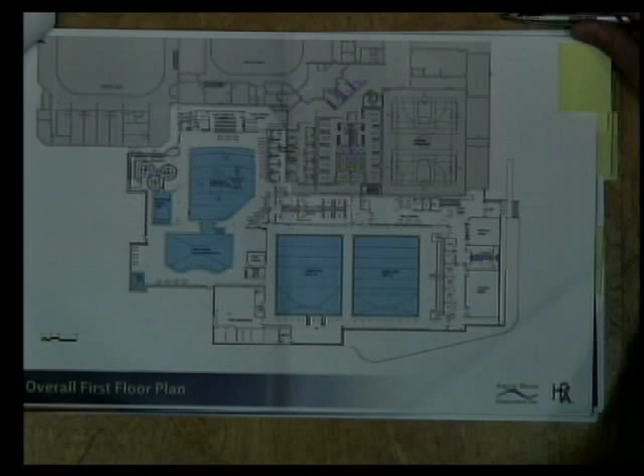We are zoomed in here on the document camera, and I'll try to orient you. For those familiar with the current facility, this area is the two racquetball courts, this is a gymnasium, over here is the main entrance, and all the way over is where the ice arena entrances are. So what we're proposing is flipping basically where the ice arena entrances are to the south side, and you would enter the aquatics addition. This is the first floor plan, and the next slide I'll show you is the second floor, where we're able to do a little bit of expansion on top of the first floor.

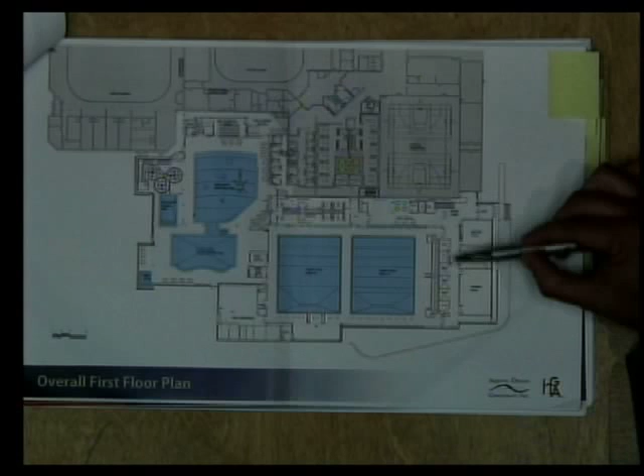So you enter in, and you can then take a left down this hallway. There's a public meeting room that, when there are swim meets, would also be the judges area to analyze scores and things, as well as the meet organizers. But it's also mainly going to function as a community meeting room. A pair of restrooms, and then what we're calling dry land training.

As we showed the council in our feasibility study, right now the swimmers are actually doing some of their dry land training in hallways, really tight circumstances, with no ability to use weights or resistance. So that's what this area would be outfitted with.

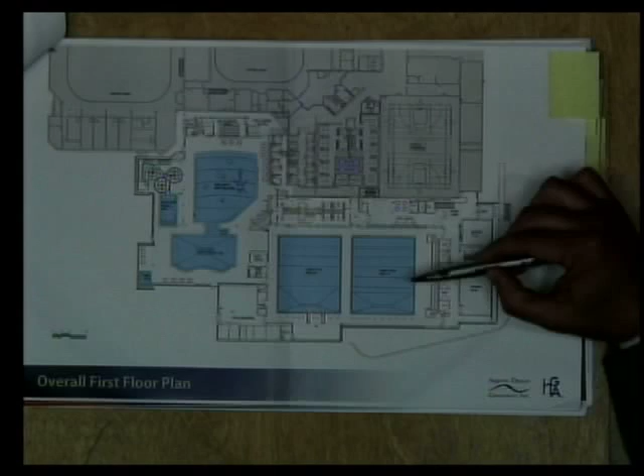This is a row of bleachers, several rows, able to seat up to 300 people. They actually go up two floors. You're looking at two pools, one being an 8-lane competition pool. This is where the starting blocks are.

This is the coldest water that we would have in the facility. It would make me shiver just being in it. But those who are really intense swimmers will love this nice cold water.

This is an 8-lane pool, same size as this one, but a little bit warmer water, with a deeper end, 2 diving boards, and a climbing wall. This is more appropriate for people who aren't as high level of lap swimmers or training for swimming, but may just want more casual lap swimming and exercising, as well as diving. The climbing wall and the deep water allow for some deep water exercise. The shallower water at this end allows those 7 to 12-year-old swimmers to advance their swimming skills.

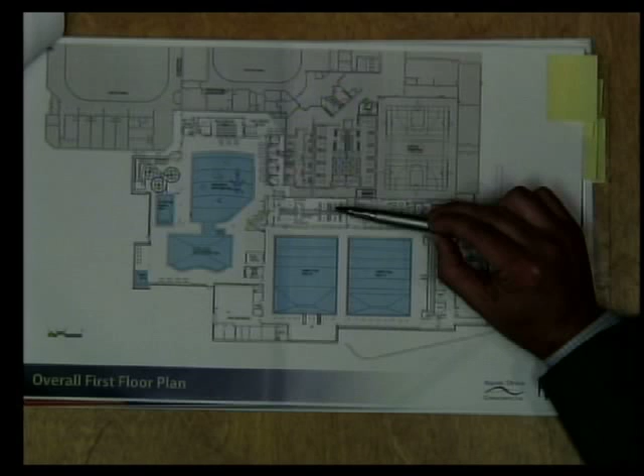We're looking at this as a phase 1, phase 2 project, but bidding it all at the same time. So as you go by the community center, it's just empty land right out here, and we would do this part in phase 1. It also has a lobby area back in here. It has what we call wet locker rooms, so you see a lot of tile in those and not any carpet, and it's really designed for just swimmers.

That's the main part of what is phase 1 in the lower level. Phase 2, I'll show you where our current pool is right in here. Once phase 1 is up, that allows us to move on to phase 2.

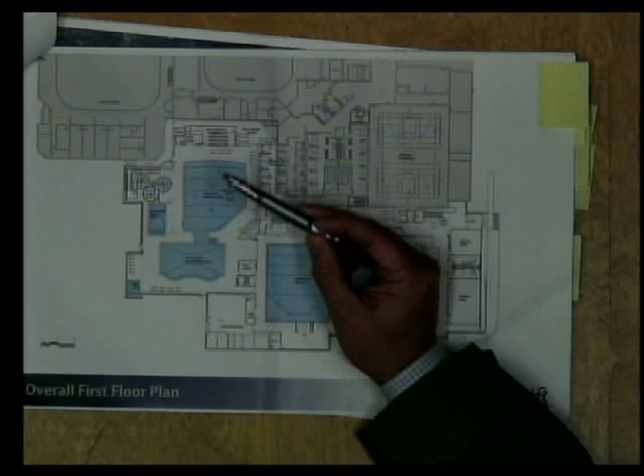This is our warmest water, and I'll show you some better renderings and photos in just a second. This is a zero depth entry. It also has a classroom that will help for some birthday parties or meetings, has some play equipment in it, and goes down into where this could also be lap swimming, but this is a really warm water pool and really family oriented and learn-to-swim oriented.

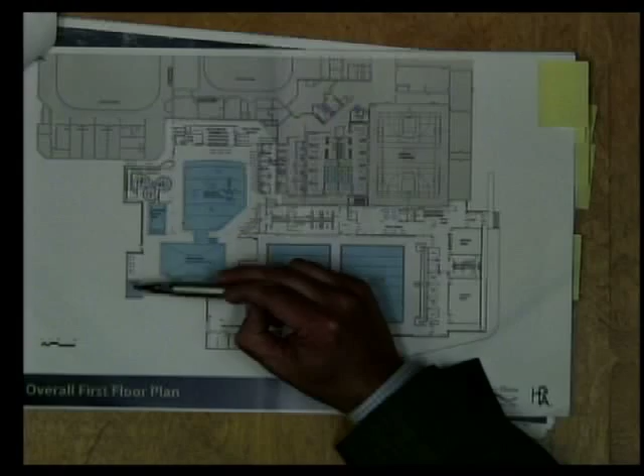There's a water slide, 2 stories, where you enter into a pool as you go to the bottom of the slide, and also a hot tub jacuzzi scenario. So those are kind of the main features of the first floor and the aquatics piece.

What it does allow us to do on the upper level, building over top of the entryway, is to expand our fitness area, add an elevator for both accessibility and safety purposes, add a restroom on the upper floor, and reconfigure the fitness studios and add an additional fitness studio to better serve the fitness activities that are happening. There's over 100 group fitness classes a week at the community center right now.

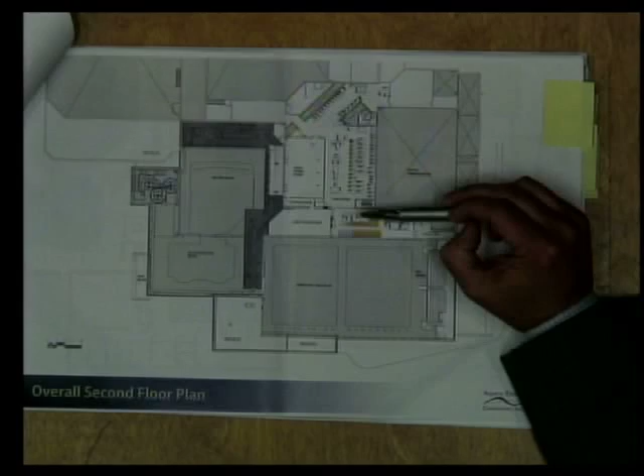If you're there at 6:45 in the morning or 6:45 at night, every one of the current treadmills and ellipticals is being used. These yellow squares represent about 20 more pieces of fitness equipment that would be able to be offered with this renovation. We'd also get a little more storage out of it, but that's essentially the second story addition to the fitness area.

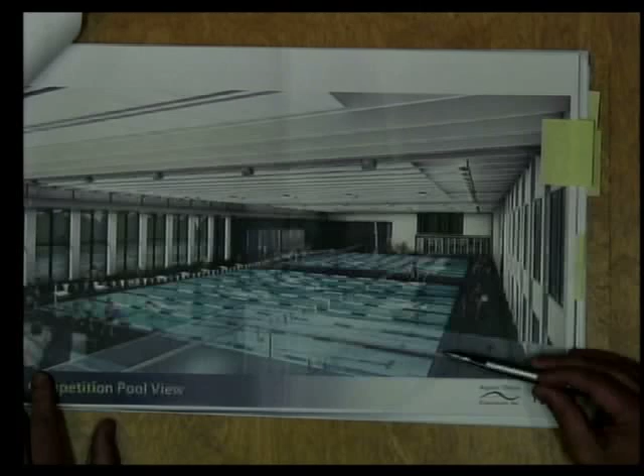This then, I'll orientate you back. Right in here are the bleachers, so you're looking across the 2 colder, more competitive pools. These are windows looking out at Valley View. This is the 8-lane competitive pool with starting blocks. You see the diving boards down here, and the climbing wall.

Eventually, this is the area that goes through to the second pool, or the recreation pool. You come out of the locker rooms on this side. Back behind the bleachers is where the entrance is, and then also the dryland training is over in this area. The bathrooms that I showed you, and then also back into this area is where the meeting room is, just off the lobby.

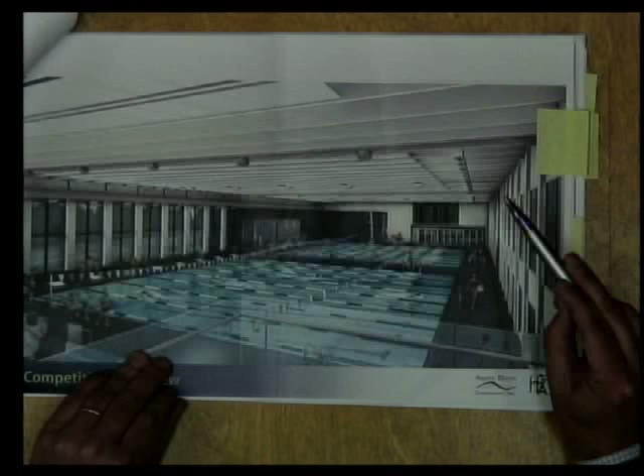Up above here, down in this area, you're actually looking out of that group fitness studio onto this body of water. Back here, out of these windows, you're actually potentially on a treadmill or an elliptical, looking into the water here.

This is just a few examples. This isn't going to be the configuration of the play equipment that would be here. That would mostly be moved over to this side of the pool. But as you can see, this is a zero depth, so you walk straight in from the tile right into the water. And then as you follow this around, that goes through into that bigger square area.

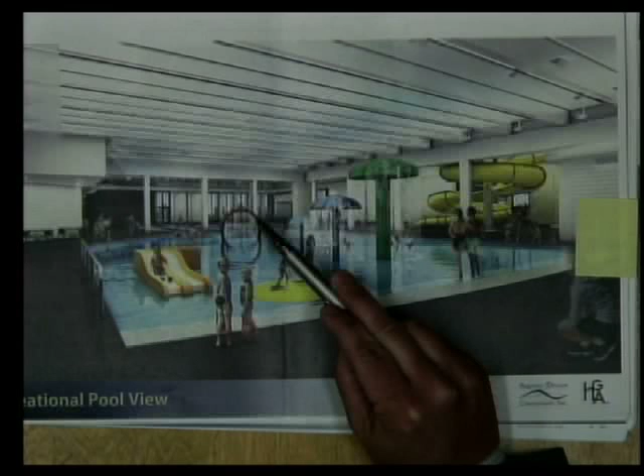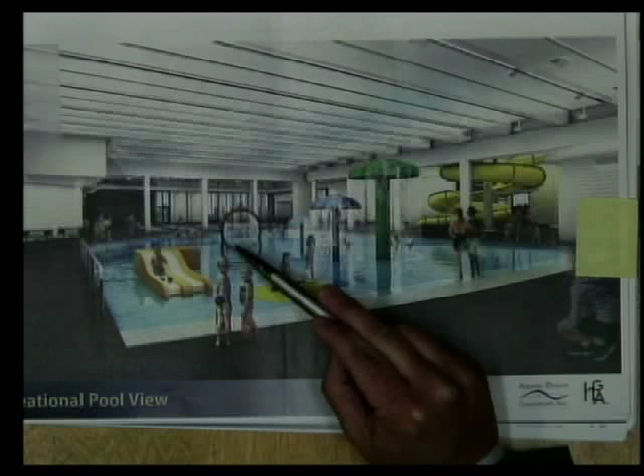That's a little more of, probably about a 20-yard potential for lap swimming in a very warm water environment. So this might be where we have some of our senior or rehab exercise classes in a good warm environment. Also, it's where some of the youngest kids' swimming lessons would take place. And then, as you can see, it's a fun place for a family to go with younger kids and be able to be in water that's accessible to kids that aren't able to swim.

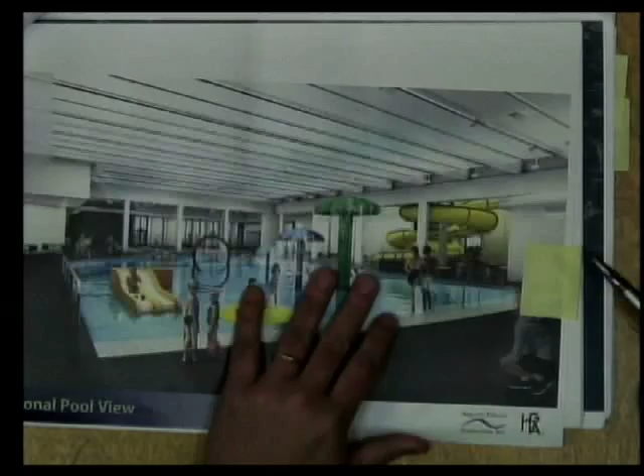A couple of other slides that I'll show you, some current exterior elevations that you're looking at.

This is where you enter. Right around this corner is the current main entrance of the community center. This right now is that big block brick wall of the racquetball courts gymnasium, so we're showing some more planting there.

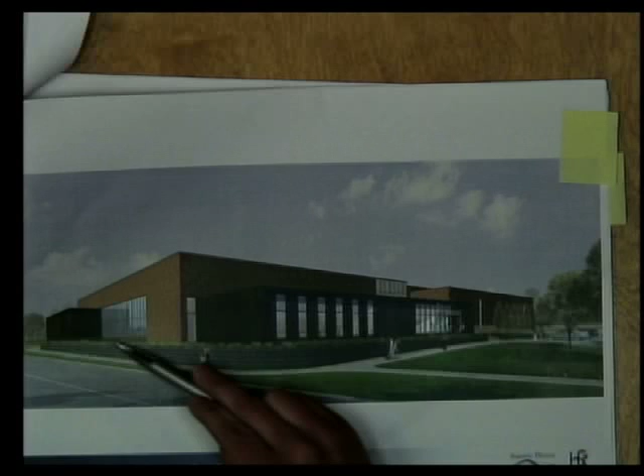Again, you enter here, go down the main spine of the hallway. You're seeing these windows are the small meeting room. This is more of the panels where the restrooms would be. This is the dry land training. And then this is going, again, along Valley View where the windows go into the pool area.

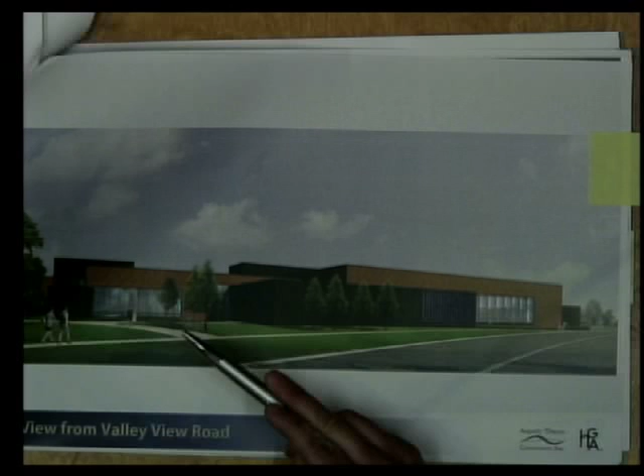This view is actually if you were coming from the high school, heading this way. Right now, all of this is kind of an open area. It's where the wading pool used to be, but that got filled in with some concrete. Really just a couple trees there now, so we're suggesting we would add in trees and make this a little more of an architecturally attractive building as you're coming down Valley View Road.

So with that, I know tonight you're looking at the variance with the setback as well as the height. I'm just going to give you a little bit of perspective on where some of those property lines are. As you head back towards the high school, this darker green represents a storm pond, so we're quite a ways away from any other buildings.

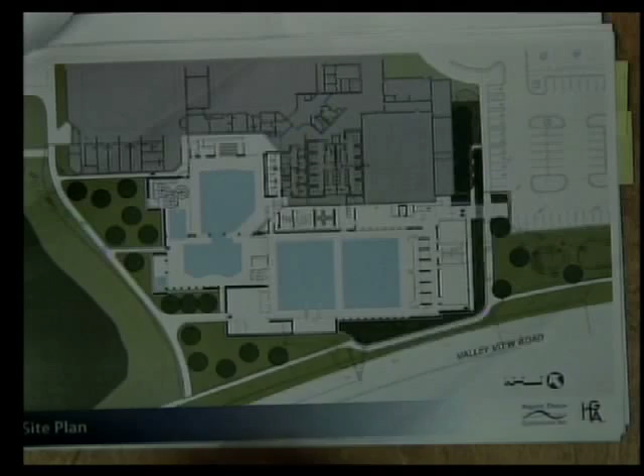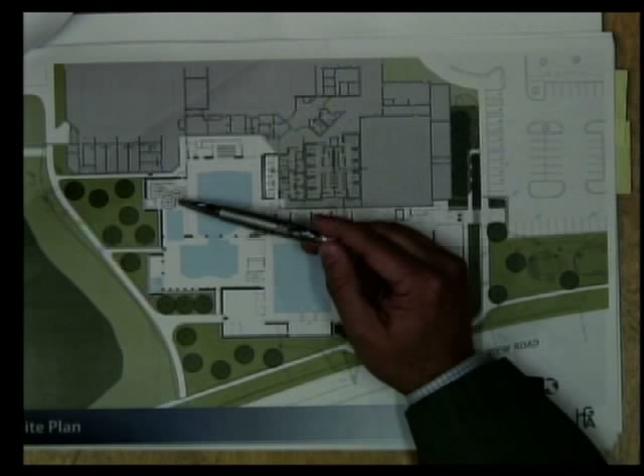We are looking at one of the higher walls is this water slide structure. That's in phase 2 at best. We're looking at having that as an alternate, and it's also being designed where if costs come back too high, we would be able to just leave that off from the project. Hopefully all things work out, but that's one of the larger cost items that would be put into an alternate, and the council would have a decision to make if that's warranted to stay in the project.

So with that, I'd certainly answer any questions or if you have other thoughts. Thank you very much.

Mr. Franzen, do you have anything to add at this time? Only that the staff recommends approval of the site plan review on 103 acres and approval of final order 2014-02.

Okay, thank you very much. Seeing how this is a public hearing, is there anyone out in the audience that has any comments or concerns about this project? Now would be the time.

Not seeing any, commissioners, do you have any comments or questions? I have a question, Mr. Franzen. I don't see parking mentioned in here. Is the existing parking sufficient for this expansion? Is there any issues around that?

Maybe there's a two-part answer. There's the park and rec, maybe scheduling point of view relative to parking, and then there's the city code relative to parking. Based upon the use of the building, the amount of parking that they have is adequate according to city code.

I'll give you the second part to that. So we have a couple of opportunities, and we want to look at that as we keep moving forward. But behind the community center, which sometimes looks like it belongs to the community center, it's actually a school parking lot. So during the day, it belongs to the high school, and the priority is for all of their teachers to be able to park there. It's roughly about 70 spots and has not yet been well discovered.

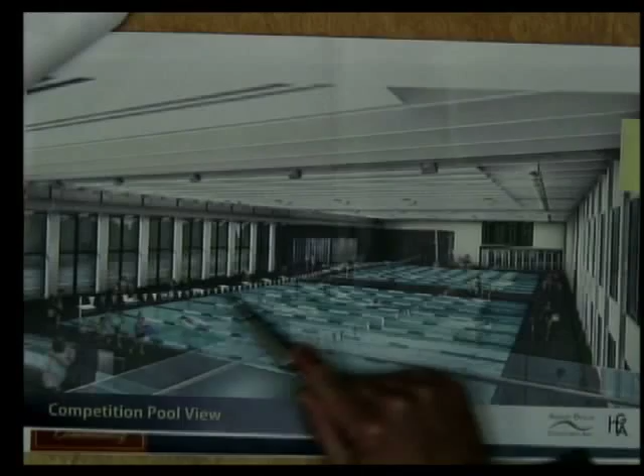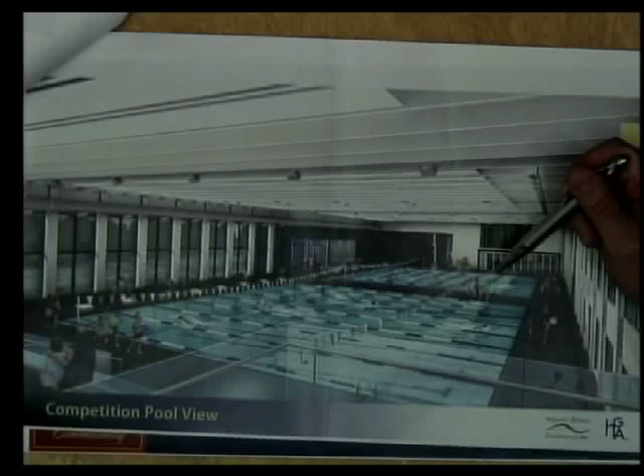So what you see here is about 7 feet 6 inches deep, going up to about 3 foot 6, coming up so you can use the starting blocks appropriately and safely. Over here, this is about 12 feet in depth, so you could do the diving piece. You're also talking about different bodies of water, which is good for redundancy and for water temperature — this is the coldest pool, highly competitive, while this is the one where you'd see the Fox Jets in the high school meets primarily.

This is the one that becomes a lot more flexible. It's probably where the kids that are going to go for open swim, if you're talking about teens that really want to get in and use the pool, they're going to go in this slightly warmer water, more depth, ability to play some water polo, water basketball.

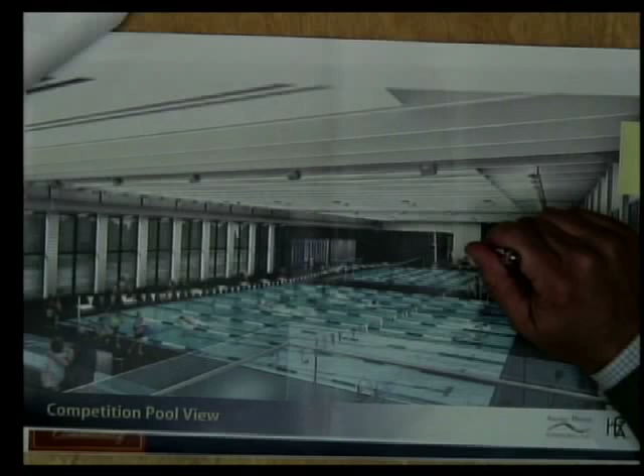As we did hear from the 1 or 2% of the most highly competitive that says you should do a 50-meter, we would love it, they would love it, but it's not the best use of the facility for overall community members, and it's not the best use of our funding sources to add that in.

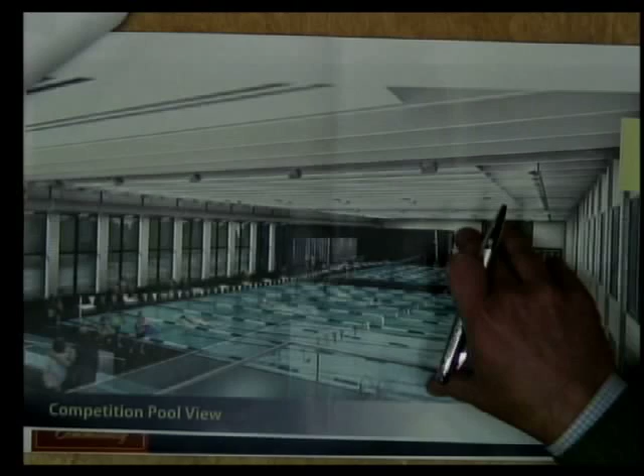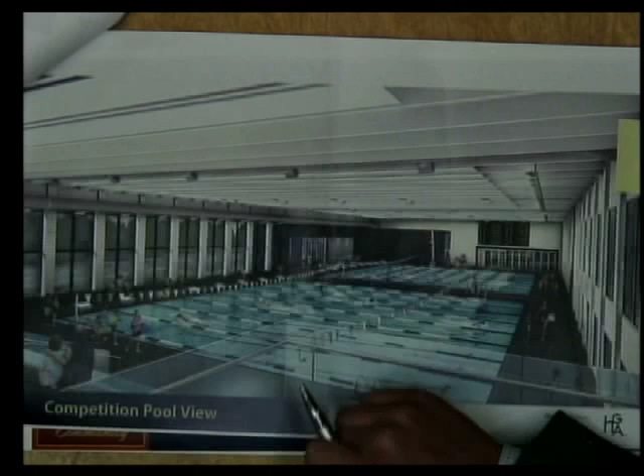We actually get more flexibility by not having this as one large body of water with a movable bulkhead than we do with having it as a large body of water, and at a reduced cost too. I think you'll see that at the U of M. A lot of colleges will do that, but it's not the best approach for a community center or community pool when you're going to have multiple bodies of water, when you could have them.

My question for you, one of the things that we're approving, if I read this correctly, is what's called the site plan review. What is that? What's the import of that, and what does that really mean? And then I have a follow-up with it.

We have a section in our city code called Site Plan and Architectural Design Review, where we look at more than just the bulk height, density, setback, and parking requirements. It has to do a little bit more about where the building is on the property, how you get pedestrian access in and out of there. What does the building look like architecturally? How does it relate to the building mass? Does it blend in? Does it add some interest to it? And how does it use landscaping more than just a quantitative requirement, kind of a qualitative requirement.

It takes... we get a better design out of the product than by following the mathematical elements of our city code. That's what it does.

Thank you. So here's, I guess, just the question I have. We've got a wonderful looking project with a lot of detail, and we're playing a role, and then there is another commission playing a role in looking at this project. And my sense from a business perspective is a little bit that some of the questions that are coming up because we are not as fully informed in terms of the background for this project and some of the details that have gotten us to where we are now, as we probably should be.

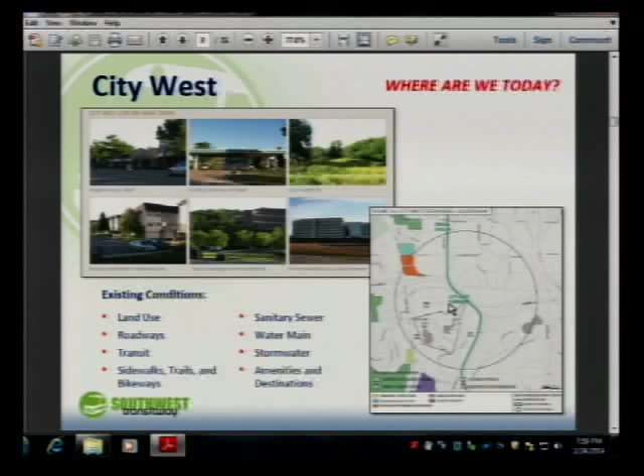We look at sidewalks, trails, and bikeways, utilities, stormwaters, and we look at amenities and destinations, because some of those things are going to drive ridership, transit ridership at each station. We want to make sure that people can get to and from those destinations to the station platforms. So for each one of the stations, we look at those kinds of factors.

At City West, the pedestrian and bike connections, what we're recommending as station area improvements is to develop more direct path connections between the station and City West Parkway, which is to the south and to the west of this station platform. We're looking at developing pedestrian connections between the station and the United Health Group buildings themselves, because you're going to have 6,700 new jobs there, and those folks are going to be using light rail.

We talked about streetscape enhancements, bike facilities at each station area, and then the idea of exploring bike sharing facilities, so like Nice Ride kinds of things, bike lockers, pumping stations, those kinds of things.

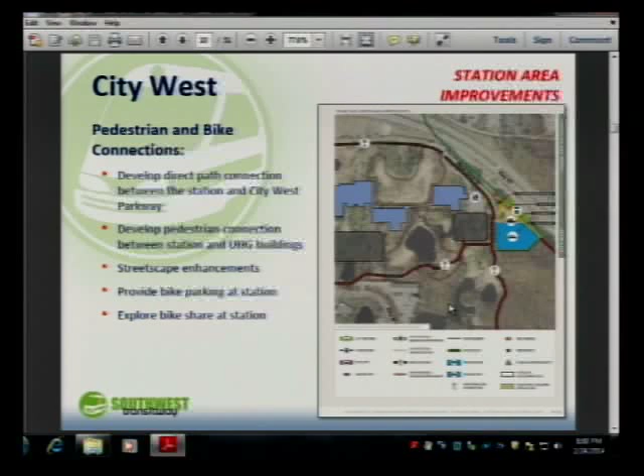We look at Kiss and Ride at this station, so folks that want to drop people off, get on the light rail, and then they take off, and then pick them up at the end of the day, that kind of thing. We look at Park and Ride, right? So the blue area on there is the Park and Ride lot. The Kiss and Rides within that area as well. In this case, there are approximately about 200 Park and Ride spaces at this lot.

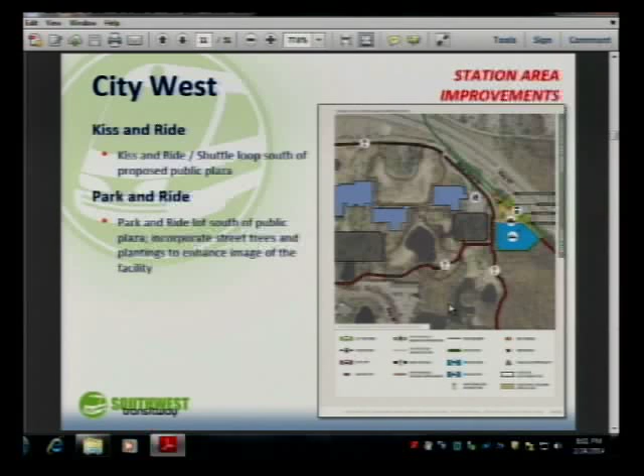200, did you say? 200, yeah. And we recommended incorporating things like trees and plantings to enhance the image of that parking facility.

We also recommended station amenities that go above and beyond what the SPO means. That's the project office. And so the engineering team is responsible for a certain amount of station area planning, which included some wayfinding, some seating, some lighting, those kinds of things.

So at each one of the station areas, if you look through the document, we recommend above and beyond that additional wayfinding that reaches out beyond the station platform itself to help people orient themselves and get to that station platform from those employment centers and from their homes. Seating, lighting, in this case a plaza area, just to the north of the Park and Ride, adjacent to the platform, public art, and bike facilities.

Development potential. At City West, the near-term development potential has to do with United Health Group. At some of the other stations, there's more development potential. But we looked at key considerations to enhance development potential around each one of the station platforms.

So we looked at things like built form and land use, the public realm, those kinds of improvements, and then mobility kinds of considerations. So in this case, built form and land use, orienting the buildings to face onto the station, maybe locating retail amenities near the station to help service transit users and some of the employees at the new United Health Group. Create a positive image on the campus and LRT from the highway itself.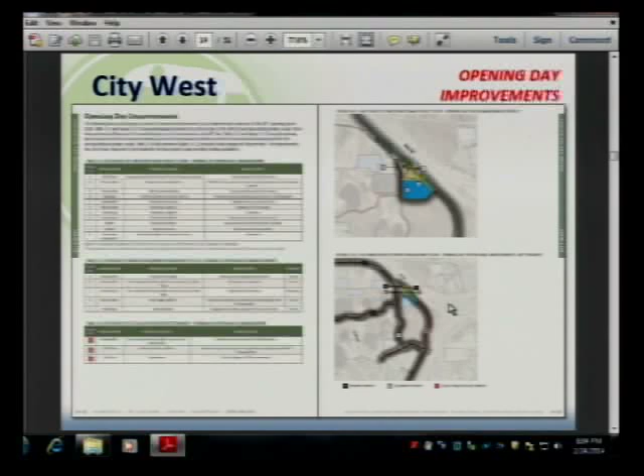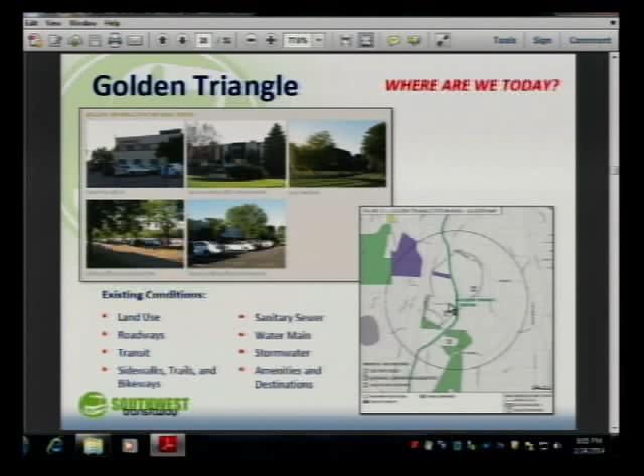So now I'll go through these a little bit quicker since we've taken the time to explain what's in that. Golden Triangle is the next southerly station. Again, we looked at the same kinds of existing conditions around this station. The existing conditions around here, the land uses include more light industrial and office kinds of uses. In this case, we recommended some new roadways.

These new roadways help activate the area around the station platform, and really help incent new development or future development near the station itself. These recommendations are pretty consistent with the Golden Triangle Land Use and Transportation Study that was done probably about 10 years ago.

In this case, the city's already been looking at extending West 70th Street to the west to Flying Cloud Drive. It also looks, long-term wise, to develop a new block and street network beyond Flying Cloud Drive and Shady Oak Road to provide some smaller blocks so it's more walkable.

Today, this is not a very walkable environment out there. There are huge blocks, very few roads, and some trails, but not really enough to promote the use of this new light rail station the way it should be used.

We looked at pedestrian and bike connections, creating a multi-use trail system from the station north to Shady Oak Road and south to Valley View Road, extending existing path networks east and west of the station platform, and new sidewalks along both sides of West 70th Street.

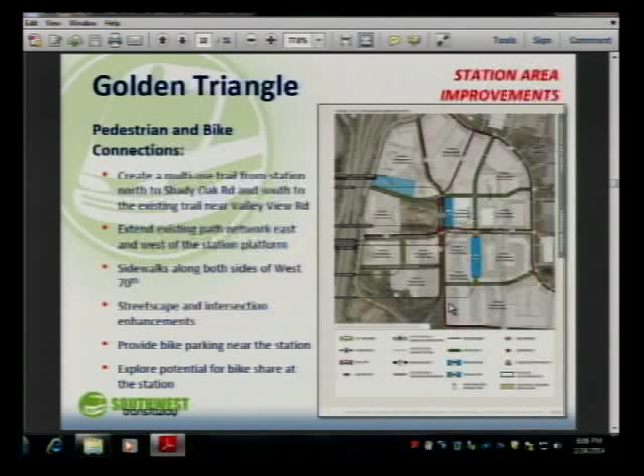We identified streetscape and intersection enhancements within the area, providing bike parking near the station and exploring potential for bike sharing near the station.

At Golden Triangle, there's a small need for park and ride. We looked near term at the idea of leasing some existing surface parking spaces in the two darker blue areas you see there to meet park and ride goals.

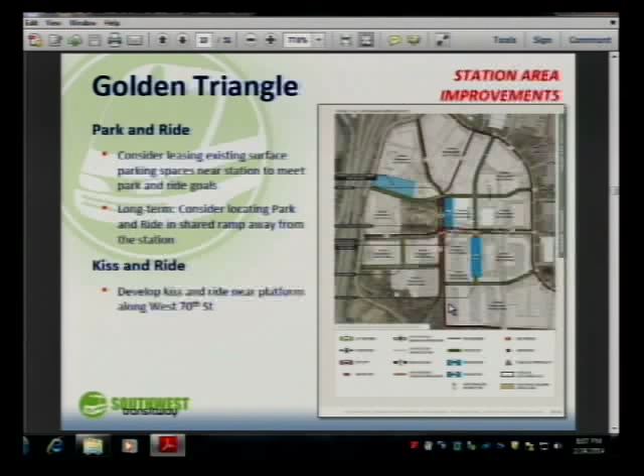Long term, there were discussions about considering park and ride shared in a ramp just to the west of the station platform, with those spaces shared with a proposed office development just to the south of that park and ride lot. There's also Kiss and Ride along West 70th right next to the station platform—similar kinds of station amenities beyond and above the SPO base project scope.

In this case, because we're recommending some new roadways, we also took a look at some conceptual street sections to try and make these pedestrian friendly, including the idea of fronting those sidewalks with new buildings. Today, the buildings are set way back from the street, so it's not a very pedestrian-friendly situation there.

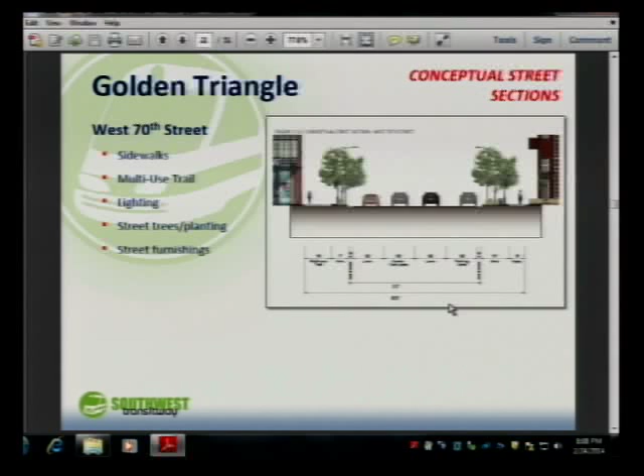Getting a multi-use trail on the north side of West 70th, the sidewalk on the south side, some on-street parking lanes in there, and then some streetscape amenities, furnishings, new lighting, street trees, that kind of thing.

We did look long-term at pretty significant development potential around this station. Again, these are consistent with that 10-year-old Golden Triangle Land Use and Transportation Study, which calls for some new housing in this area, medium to higher density housing—so you're talking about townhomes and apartment-style units.

You can see those in the colors that are sort of pumpkin-colored to brown—that's more of the multifamily housing. The darkest brown also includes mixed use, so maybe at the ground level near the station platform there are coffee shops or restaurants, those kinds of things that help support transit users at the station platform. And then you see some office uses and commercial uses, which are pretty consistent with the uses out there today.

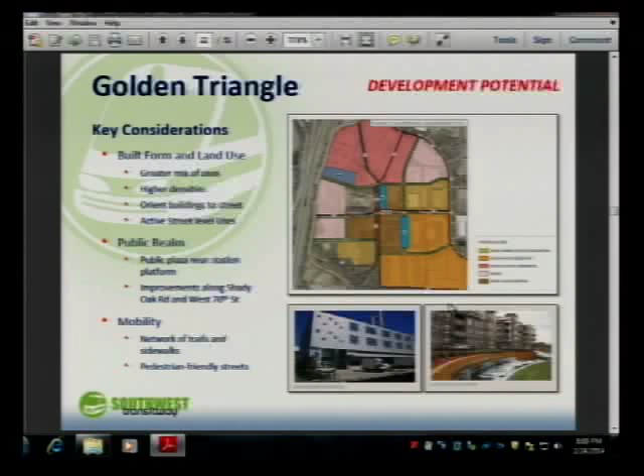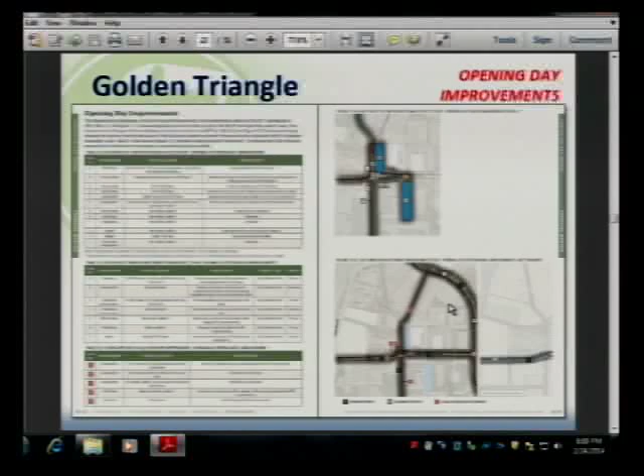Eden Prairie Town Center is the next station coming south of Golden Triangle. Again, looking at the same kinds of existing conditions, you all know there's a lot of commercial and retail kinds of uses around there, some office uses, some multifamily housing, and some significant park and open space uses as well.

We're recommending some new roadways consistent with the town center master plan, creating smaller block patterns and a more connected roadway network, which will make this a much more pedestrian-friendly town center. To service the proposed alignment and station platform location, Eden Road would need to be extended west to the station platform. We've also looked at extending or building a portion of what's been identified as Main Street from Singletree Lane north to Technology Drive, providing north and south connections through the town center from the station platform.

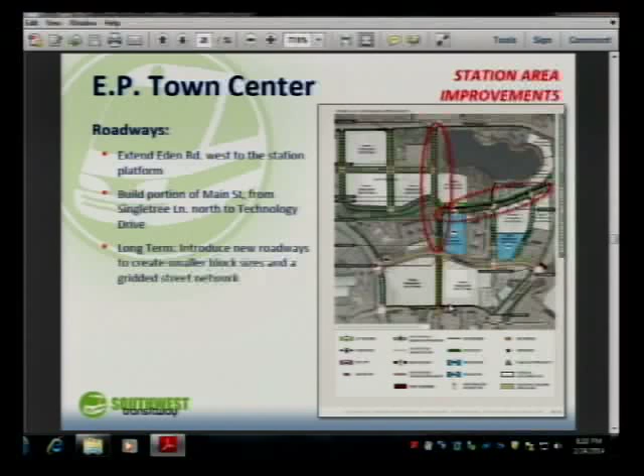Long term, those new roadways create smaller block sizes and a more gridded street network in the town center itself. Ped and bike connections, streetscape enhancements, connecting to the regional trails, improved pedestrian crossings at the intersections. Complete street design is recommended here, trying to accommodate as many forms of transportation as possible: the car, the pedestrian, the bicycle, and public transit.

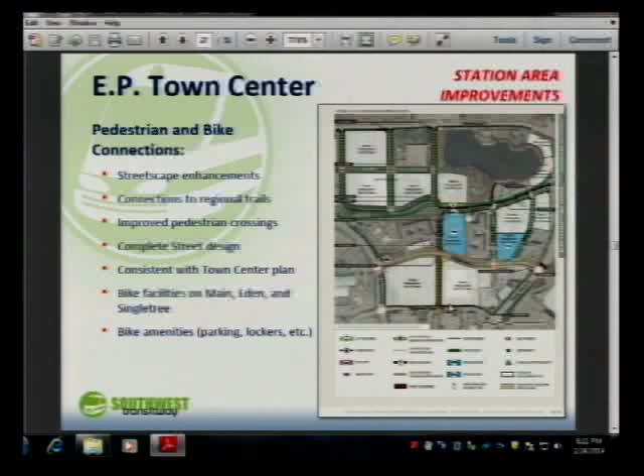This plan here that you see is consistent with the town center plan. And then new bike facilities on Main, Eden, and Singletree, and bike amenities at the station platform itself.

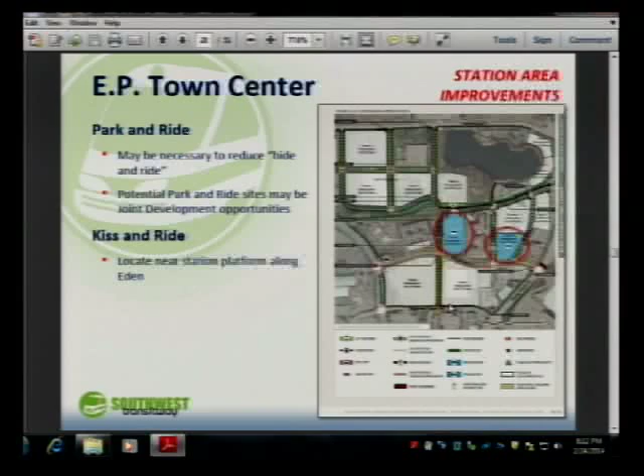We did look at the idea of perhaps some park and ride within the town center itself, particularly early on, before the town center becomes what the city has envisioned. The idea was to try and reduce what we call hide and ride, where people park in some of those existing parking lots today and then use the transit system. So we identified a couple of park and ride sites that also could be looked at as potential joint development sites—meaning it could be a park and ride ramp wrapped with maybe some retail use at the ground level and other kinds of uses integrated with that building itself.

And then the kiss and ride near the station platform along Eden Road. Similar kinds of station amenities: wayfinding, seating, lighting, a plaza near the station platform, some public art, and bike facilities.

Eden Road, we've taken a look at that as well, extending it west to the station platform. So you see this conceptual street section here with on-street parking, sidewalk and trail on both sides of the street, transit facilities, lighting, street trees and plantings.

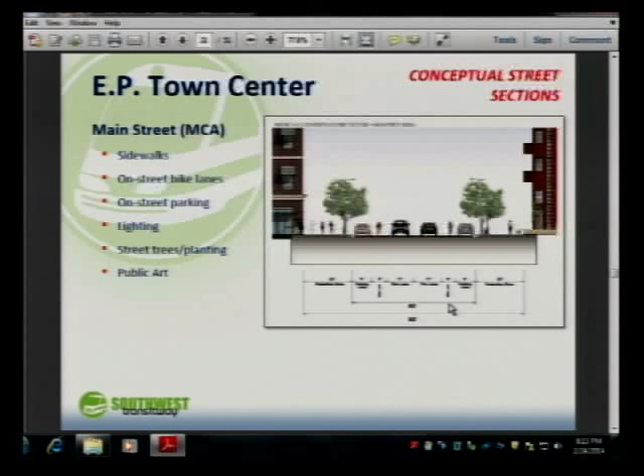We've also looked at the future Main Street, consistent again with the streetscape master plan done for the city a couple years ago. So generous sidewalks, 20-foot sidewalks on both sides of the street, some on-street bike lanes, on-street parking, lighting, street trees, planting, and public art.

And then, of course, with those infrastructure improvements and the idea of trying to create this town center, there's tremendous development potential. Those new roads and the investment in the light rail station should incent new development in and around the area.

We looked at mixed-use infill, uses consistent with the town center plan—orienting buildings to the street, active street-level uses, an active public realm with a plaza, and some improvements along Flying Cloud Drive to try to reduce the perception of that being such a wide roadway and bridge the gap a little bit between the town center itself and the shopping center across Flying Cloud Drive.

Mobility, the new street and block pattern, and pedestrian-friendly streets should all help make this a more pedestrian-friendly environment.

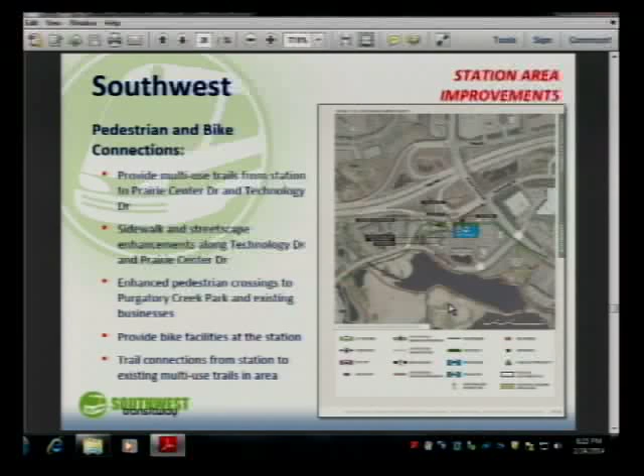The park and ride at this station may require some expansion, so perhaps a new ramp. That is yet to be determined, but if that is the case, that would be paid for by the engineering project. The Kiss and Ride located near the station platform too. Similar kinds of station area amenities.

And we didn't see a tremendous amount of development potential around this station, but some. In this case, integrating active street level uses within the park and ride facility in the event that a new park and ride ramp would be built. Introducing a mix of high density residential or commercial uses over time on some of the sites that today might be surface parking lots. And then orienting buildings to the street.

Mobility improvements would include things like minimizing conflicts between the bus drop-off and the Kiss and Ride, improving access and connections to Purgatory Creek Park. Opening day improvements.

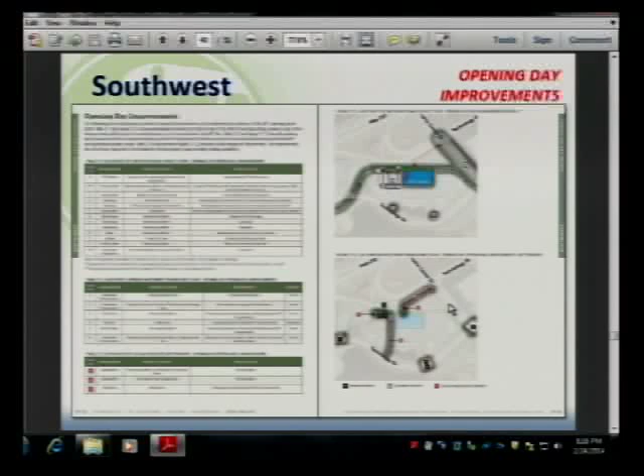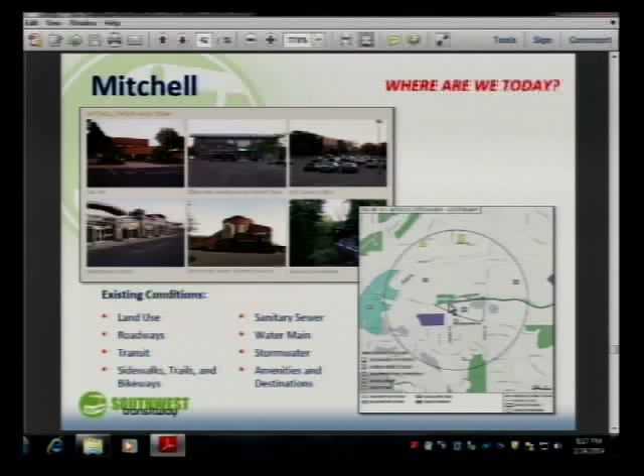And then we'll go to the end of the line here, Mitchell Station. Existing conditions, looking at that. Some light industrial, some office. Of course, the city center here, and then residential to the south.

And one of the things that we saw here is being able to improve connections to that residential neighborhood to the south by extending Hiawatha Avenue from Scenic Heights Drive to Technology Drive to the station platform, so that folks who live in the residential neighborhood to the south don't have to come all the way over to Mitchell Road and then make a long walk over to the station platform itself.

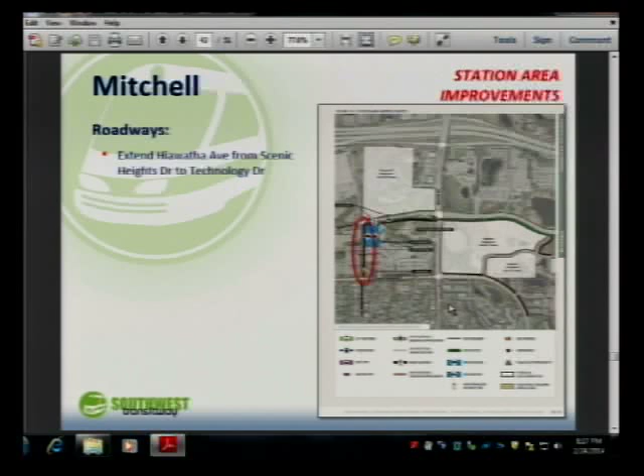So the station platform was located near the north end of where that Hiawatha Avenue would be. And there's also been a park and ride ramp identified there in the blue, just to the northwest of the city center here.

Pedestrian and bike connections looked at streetscape enhancements on some of the existing roadways and on Hiawatha Avenue. New sidewalks and trails to complete the existing network and connect to nearby neighborhoods and businesses, and then bike amenities near the station. I mentioned the park and ride, which would be a new ramp, projected to have about 960 spaces in it, something like that, close to 1,000.

In the northwest corner of the city center site with access off of Technology Drive, the Kiss and Ride facility would be located in that same site area with access off of Technology Drive. Similar kinds of station area amenities at this station platform too. And here you see the conceptual street section for Hiawatha Lane.

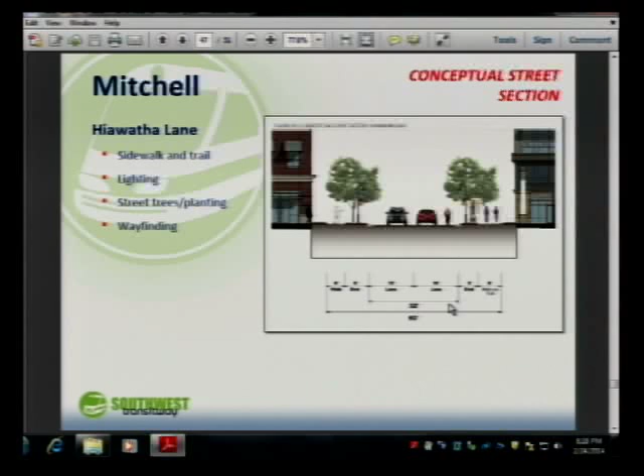Key considerations for development potential around the area were primarily to do with maybe over time increasing some of the density and mix of those uses that are out there today, which include office and light industrial. Maybe some food and services to help service some of the employees near the station, orienting buildings to the street, active street level uses, and a pedestrian promenade between the station platform itself and City Hall with some landscaping.

We see folks that work and use the city center here as being potential transit users. And then enhancing mobility to and from the station with pedestrian-friendly streets and some new sidewalks and that kind of thing. Opening day improvements.

Mitchell Station was one of the 4 stations along the line that was identified for our team to look at stormwater best management practices. The 4 different stations represented different kinds of circumstances - very urban circumstances, very industrial kinds of circumstances, and in this case, a more suburban-like circumstance here.